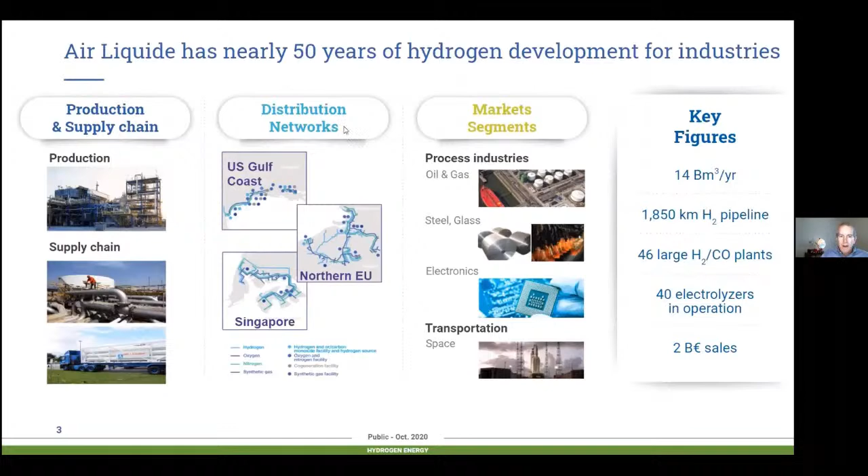When we think about hydrogen of the future, we're thinking about different applications than the industrial applications. And I'd like to tie us back to the Hydrogen Council, which is an international organization of CEOs from the leading companies in the hydrogen business, growing from the original 13 members now to 92 members, representing all different sectors of the economy, all different sectors of the world.

And that's reflected in some of the road mapping discussions focused around the US, how that dovetails with the global perspective. But let's talk about some of the things that Air Liquide is doing along this roadmap for investments, especially in North America. There's really 2 big projects that I'd like to capture today.

The first one is a new hydrogen production facility located in Nevada. It's a $150 million investment, so a fairly large investment for a company like Air Liquide, producing 30 tons per day of hydrogen that can be produced from renewable natural gas, so essentially renewable liquid hydrogen production, located in North Las Vegas, Nevada, with expected production to start in early 2022. Construction started earlier this year.

The second project I'd like to talk about is our largest PEM electrolyzer project, supplying 100% decarbonized hydrogen in Canada. This one is located in Bécancour, which is just north and east of Montreal. It's a $40 million investment, able to produce about 8 tons per day of electrolysis-based hydrogen. And all of this feeds into an existing liquefier that we have at the site, where we have other operations managing industrial hydrogen, for example.

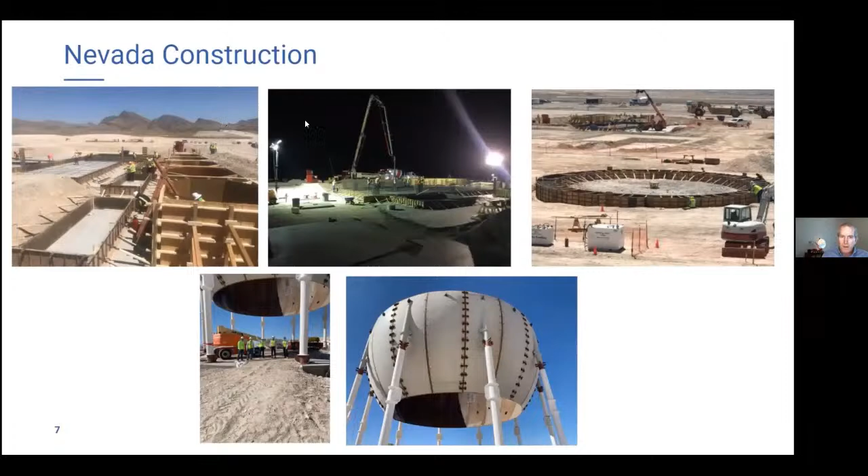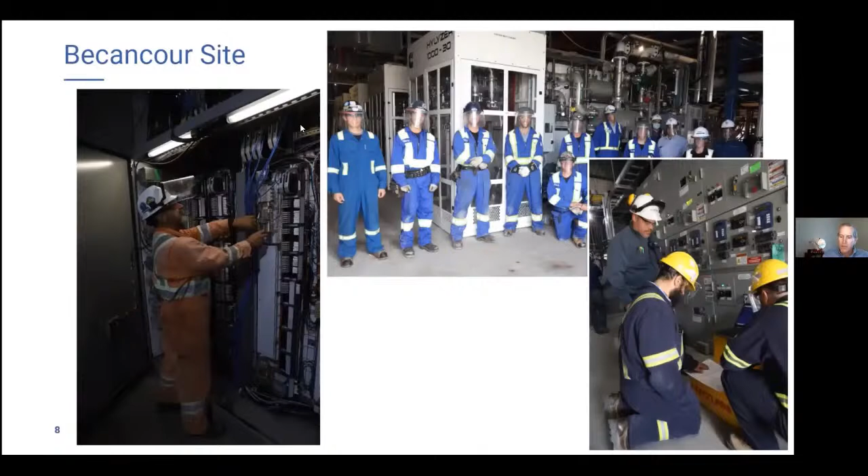The next project pictures are around the Bécancour site. Electrolyzers aren't quite as flashy. They tend to be small and they tend to be indoors, but the project for us is just as exciting. And you can see some of the pictures of the electrolyzer units and some of the electrical switchgear that's necessary for these projects. A very different kind of project, but having some of the same applications, and again, dedicated entirely to these new mobility markets, in this case, entirely renewable based on hydropower-based electrolysis projects.

One of the questions that we commonly get is, when will electrolysis-based hydrogen really be ready for the market? And I think what we're able to say is that the scale-up has already started, and projects like our project at Bécancour represent the future of electrolysis-style projects globally.

Just a few years ago, we saw the very first megawatt-sized electrolysis projects. And now we've seen announcements and investments by ourselves, by our competitors, and by other people in the market at equal scale, showing these many tens of megawatt size projects, leading to a future that's going to be hundreds of megawatts, potentially into the gigawatt scale of production for the next phases.

And these kind of investments are representative of what we're seeing around the world. So if you're questioning whether electrolyzers and electrolysis-based hydrogen is our future, you can look at the production rates from these projects and determine that we are on the pathway to that being the norm.

In addition to these, we've made a lot of other investments with Air Liquide, things like investing in some of the technologies with Hydrogenics, who produces those PEM electrolyzers, but also making investments in some of the users of the hydrogen, for example, FirstElement Fuel, who runs a network of stations in California. So by forming strong partners and by making these kind of investments, we're very bullish on the future here and looking toward a future of renewable hydrogen in the mobility markets.

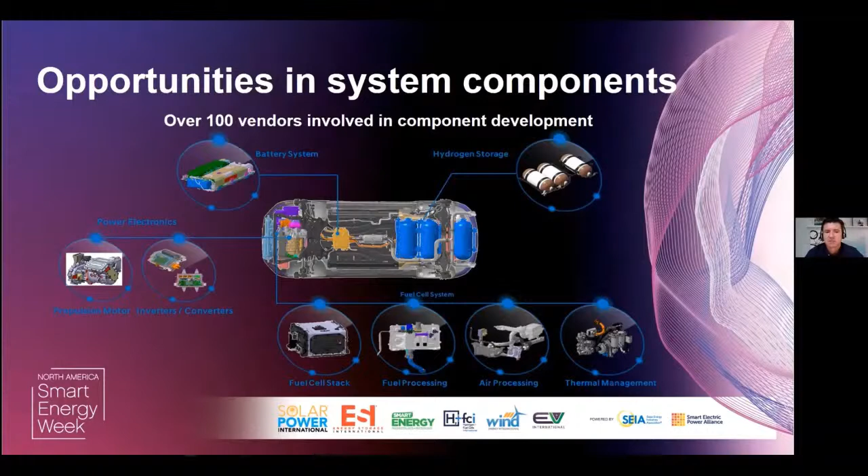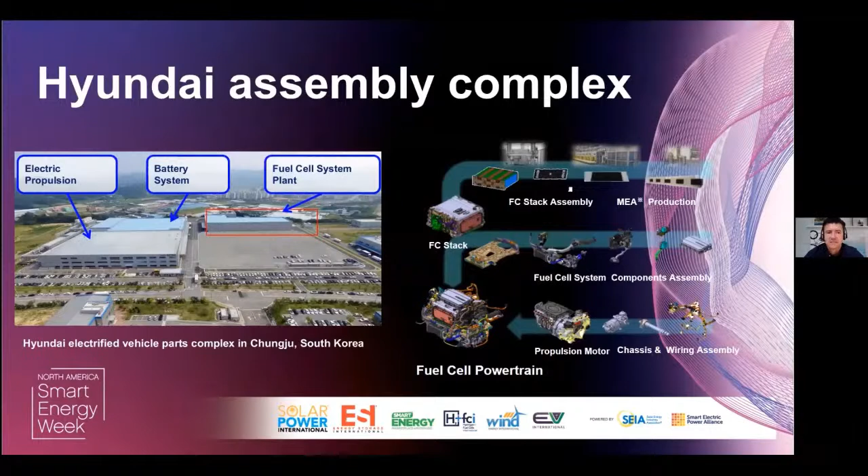So Hyundai is doing its share of investments and it believes in electrification. Here's an example of a complex built in the city of Chungju in South Korea, where we have some buildings dedicated to electric propulsion and battery systems, but we also have some buildings now dedicated to the fuel cell plant. The right side of that slide indicates all the components I was talking about that can be made in other facilities and come here to be assembled and create a new generation of powertrain.

You have transportation of that hydrogen that can also be an opportunity, and right now we convey it mainly by trucks, but maybe there are other applications that could be foreseen on a case by case basis. There's a distribution of that hydrogen, which is very similar to what you would have with gasoline, so you have employment there as well, and then customers. Obviously, we need a customer that can understand this ecosystem, and there are opportunities there too, depending on how customers purchase vehicles, for new business models going beyond the classic ownership we're used to.

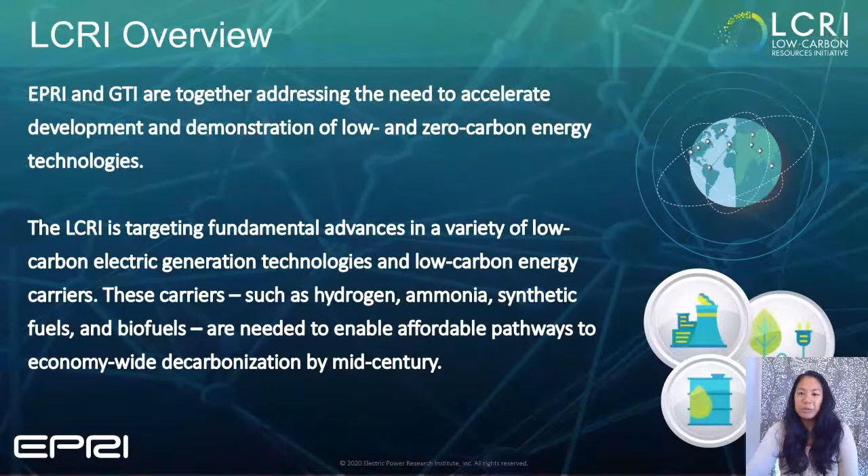We have made significant progress in terms of reducing our CO2 emissions by using solutions and technologies such as converting over from coal to natural gas for power generation, integration of renewables such as wind and solar, increasing our energy efficiency, and also looking at electrification in use cases where it makes sense. But as we start to move towards deep decarbonization economy-wide, we need to start looking at other low carbon resources such as hydrogen, things like ammonia, biofuels, and synthetic fuels. And that's what the Low Carbon Resources Initiative is going to focus on.

The LCRI is a 5-year global collaborative that is focused on low carbon resources such as hydrogen. We will look to identify and accelerate low carbon technologies, look to conduct technology assessments, inform stakeholders, and look to perform pilot and demonstration scale type projects for a broad range of technologies and solution pathways.

The LCRI will address low carbon resources or alternative energy carriers such as hydrogen, ammonia, biofuels, and synthetic fuels. And it will focus on the entire value chain, that entire ecosystem as it relates to these low carbon resources. We will look at technologies and solutions for the production of these types of low carbon resources. For example, when we look at hydrogen, we'll look at various technologies to produce clean hydrogen, whether that's green hydrogen coming from electrolysis or blue hydrogen coming from the use of existing fossil fuel assets such as natural gas.

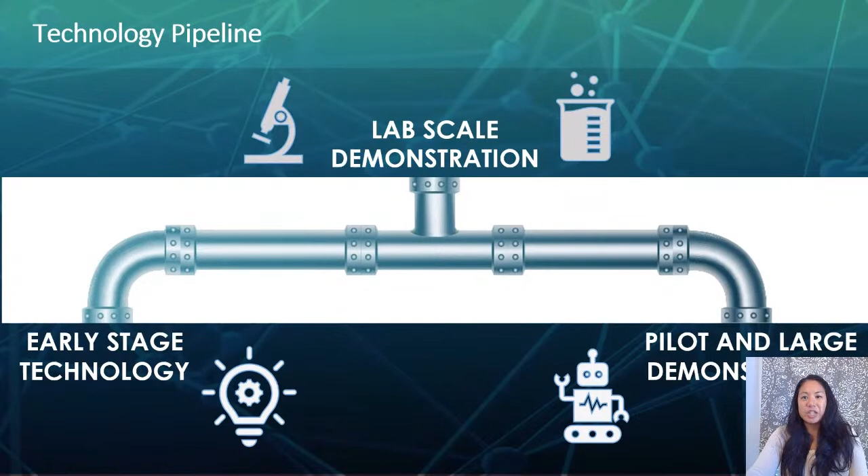One of the key elements associated with the LCRI is establishing our technical collaboration network. So this is part of our stakeholder engagement and really an opportunity for us to engage with the broader R&D community. We are looking for organizations such as universities, other R&D organizations, and national labs to participate in the technical collaboration network. We recognize that the R&D that needs to be conducted cannot only be done by GTI and EPRI, and that we must leverage all of our resources when it comes to the broader R&D community.

So this will provide us an opportunity to engage with other stakeholders on key aspects associated with the LCRI, as well as provide a network that we can lean on when it comes to conducting peer reviews of various research studies, as well as key milestones within the LCRI. So we're excited to be able to establish this, and we look forward to having broader engagement with the R&D community as we continue to execute studies under the LCRI.

Through the establishment of the Technical Collaboration Network, we anticipate not only being able to share knowledge and information through various meetings, but also to be able to offer opportunities for journal publications, as well as conferences that are focused on the LCRI research. Again, this is really to focus on that broad stakeholder engagement with the R&D community. And so we hope that you consider joining the TCN and engaging in the LCRI.

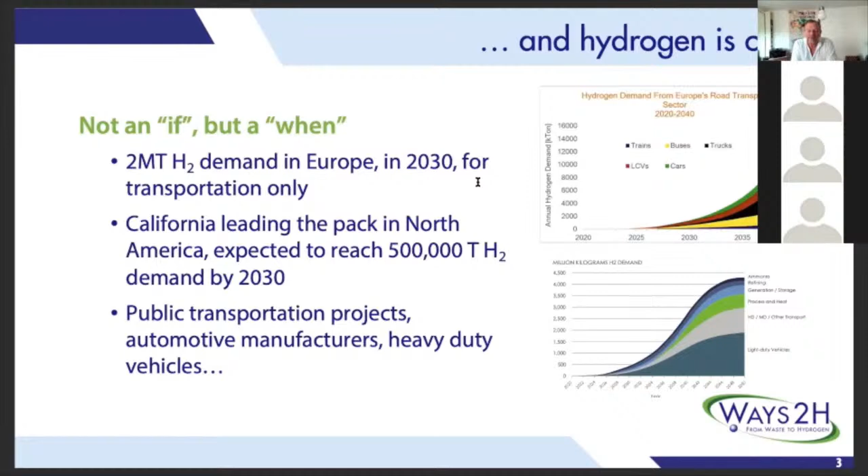Well, it will come from public transportation projects like fuel cell buses, fuel cell shuttles. Of course, automotive manufacturers are getting into this market. We already see Toyotas, Hondas, Hyundais, Mercedes-Benz is also coming, bringing fuel cell electric vehicles to the market, and also, of course, heavy-duty vehicles like trucks, forklifts, or other port logistic equipment that are gradually turning to hydrogen-based solutions.

And why hydrogen? Well, hydrogen is renewable, or hydrogen has to be renewable. It is a clean source of energy. When hydrogen is being consumed, the only output of that consumption is water. There is no CO2 being emitted, no carbon monoxide, no hazardous emissions, no particles, not a single greenhouse gas.

And it is important to realize that renewable energy is not only solar, it's not only wind. And the public today, when hearing about renewable energy, usually would think about solar, about wind. Again, we are totally for this type of energy. We do believe, and we know that these are absolutely necessary, but there are applications where solar electricity, wind electricity, hydroelectricity will not be enough. And most of these applications relate to

applications where today we are using fuel like diesel oil, like gasoline, applications where the users require a quick refill, applications where the users require a lot of power, like heavy-duty vehicles, and also possibly long-range mileage, for example, again, trucks or buses. Also, long-term storage is something that is much easier done with hydrogen compared with batteries, which although having made a lot of progress in terms of cost, in terms of storing capacity, still are showing a few challenges.

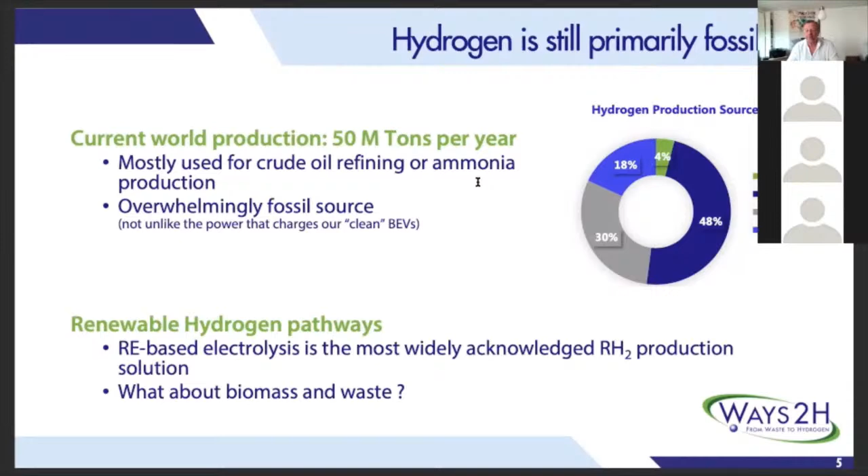Of course, there are pathways for renewable hydrogen. The primary pathway today is renewable electricity-based electrolysis. Most projections about renewable hydrogen production are considering this electrolysis as the pathway for renewable hydrogen production. But we do believe that there is a potential third pathway, another solution, and that would be biomass and waste.

The primary reason for that is waste to hydrogen solutions, first, are predictable. They operate continuously 24/7. And while doing that, they are also addressing another major environmental issue, which of course is waste. When designed as small-size distributed systems, these solutions improve waste logistics, make our environment better, and also can provide a decentralized energy production. We're talking about the microgrids of the future, the waste logistics and the waste processing microgrids, as well as the energy production microgrids.

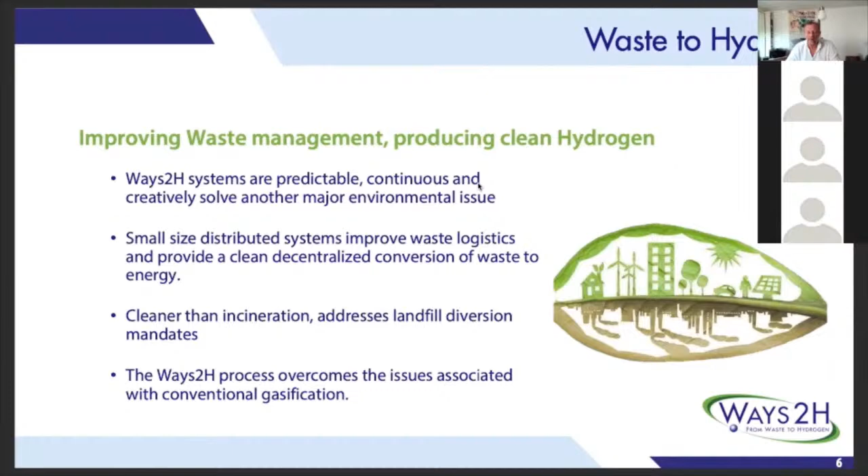The solutions like ours, like the one we are today promoting and commercializing, are of course cleaner than incineration, but also at the same time they address another major challenge that is today presented to waste management companies, which is landfill diversion mandates. Lots of states, lots of countries are trying to reduce the impact on landfills and are actually issuing mandates to the waste processing industry so that they reduce the quantity of waste being sent to landfill. We are offering a solution like this.

We talk a lot about waste, but actually there is already a renewable source of energy that everybody knows, that's biomass. It's being used for biofuel production, also for other applications like cosmetics, perfumes, etc. But a biofuel, when used in a car, and you may know that there actually is a fraction of biofuels in the gasoline we are using today, well, those biofuels are still emitting CO2 and other greenhouse gases.

The US Department of Energy and the Oak Ridge National Lab issued a report in 2017 called the Billion Ton Report. That report basically states and demonstrates that there is approximately 1 billion tons of biomass potentially available in the US. This billion tons of biomass is equivalent to about 50 million tons of hydrogen. That's the current worldwide production.

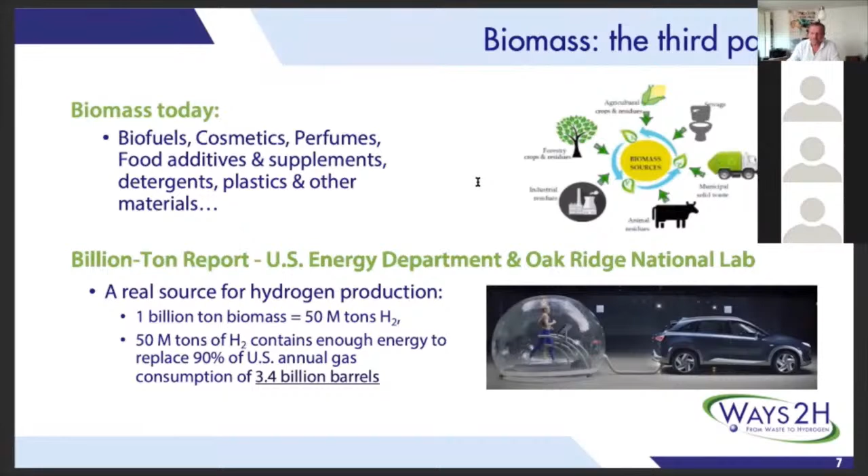And it has a lot of advantages. The thermochemical conversion processes that are being used to convert biomass into hydrogen, most of them are self-sufficient. They do not need external energy sources to operate. They can produce either a gas or liquid fuel or hydrogen like ours without needing an external source of energy. They are clean, so they significantly reduce the current greenhouse gas emissions.

They basically have no liquid effluent. There is no waste coming out of it, except maybe one single output of carbon dioxide that, because the source is biomass, is basically neutral. It does not add carbon dioxide to the atmosphere. It merely replaces it. But because it comes from a single output, there are further beneficial uses for this CO2 that we will talk about later.

And I said earlier in our introduction that waste to hydrogen is not here to compete with solar electricity. What we need to realize is today the electricity production infrastructure worldwide is generating about 20,000 terawatt-hours of energy per year. At the same time, the fuel consumption in terms of energy is 31,000 terawatt-hours, also worldwide per year.

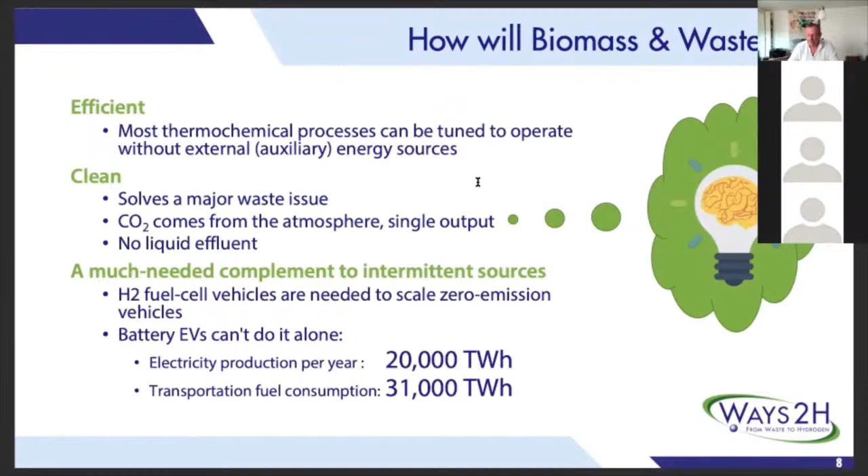And we only have two byproducts. One is ash, the inert minerals contained in the biomass and the waste. The other byproduct is the flue gas I was talking about earlier, which contains carbon dioxide, and again, it is important to realize that this carbon dioxide does not add greenhouse gas to the atmosphere.

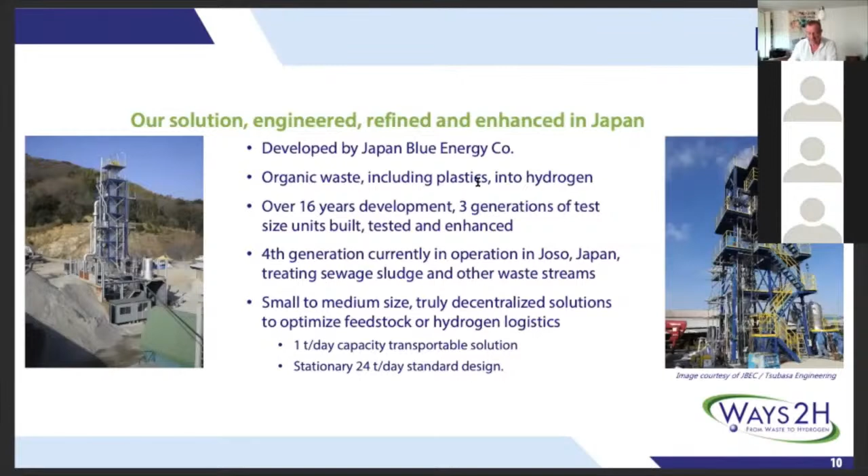And we offer our solution in basically two designs. One is a transportable unit with 1 ton per day waste processing capacity. The other standard design comes with a 24 ton per day processing capacity. It is a stationary system that more or less looks like the one you can see on the left side of this slide.

How do we do this? Who are we? Ways2H is a partnership between Japan Blue Energy, the developer of this technology, based in Japan, and a group of investors gathered under a company called Clean Energy Enterprises.

We are based in Long Beach, California, and from Long Beach, California, we are providing engineering, construction, as well as commercial developments for the systems that embed this technology developed by Japan Blue Energy. So we are not system operators.

What we do is we build and sell systems to potential users, either companies who have a problem with waste and want to process waste in a clean and efficient manner, or companies, operators who want to enter this emerging market, which is renewable hydrogen production. The solutions we offer are decentralized energy production solutions.

That means being able to process between 8 and 48 tons per day of waste, and out of this waste, extracting between 300 kilograms and 2 tons of hydrogen per day. Just as a reference, the average hydrogen filling station would consume approximately 1 ton per day. So what you have here really is the hydrogen and energy station of the future. Actually, that future is not so far away. We can probably say it's the station for the 21st century, because those systems are available now.

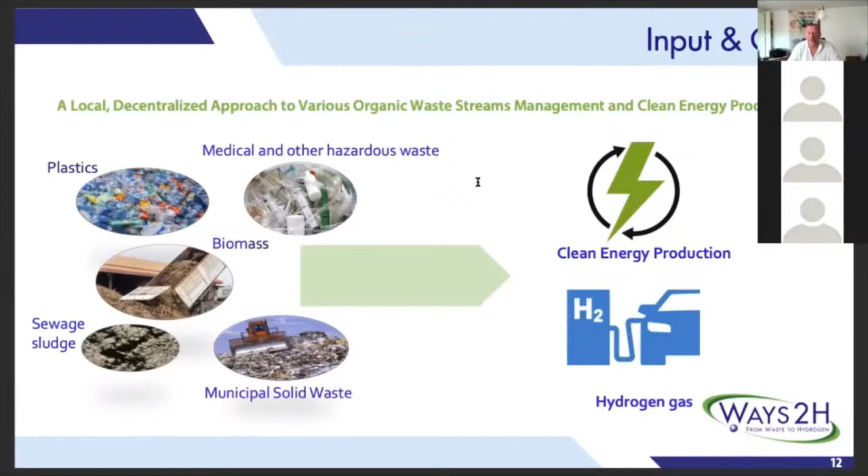This hydrogen can be used directly as a gas for clean mobility applications. And wherever there is no application yet for clean mobility and for fuel cell vehicles, this hydrogen can be directly injected into a stationary fuel cell and produce power locally. So again, what we have here is a local, decentralized approach to waste stream management and clean energy production.

Applications for this? Well, I'm maybe a little redundant here, but the primary application for our solutions is hydrogen production for the clean mobility market. Hydrogen is still presenting a few challenges in terms of logistics. Hydrogen is not a very dense gas. It needs to be compressed to be moved around. The fact that our systems are decentralized allows the processing of waste locally.

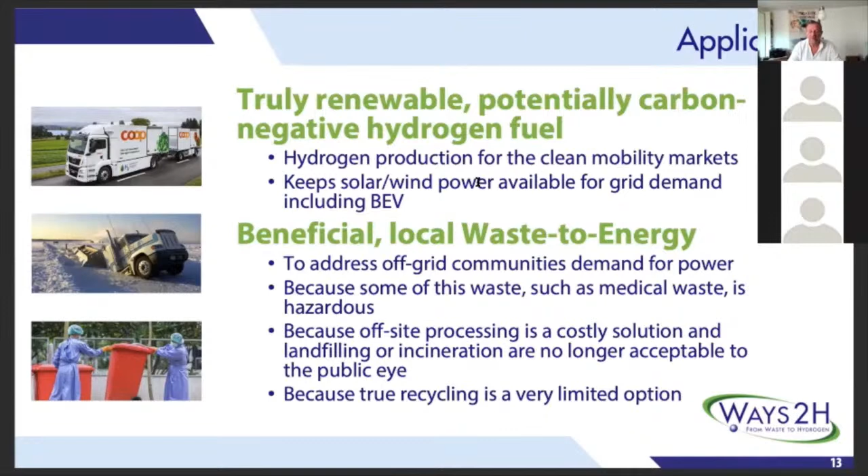This is very important, for example, for medical waste processing. As you can see on the bottom photo, you don't want to send hazardous, potentially pathogenic waste over long distances for remote processing. We want to process this locally. And also, we want to produce hydrogen where this hydrogen will be needed: directly, for example, in a hydrogen filling station, or in a remote community where this hydrogen will be used for power generation, or also to fill the tanks of the clean mobility vehicles that are coming today.

Well, using biomass and waste as a hydrogen source offers an opportunity to go even beyond being merely carbon neutral. When combining our solutions with carbon capture and sequestration technologies, the fact that CO2 comes from one single output point makes this carbon capture and sequestration technology easier to implement together with our solutions.

And in that case, this renewable carbon that comes from the atmosphere, that was part of the production of the biomass and of the municipal solid waste that we are processing, is effectively taken out of the atmosphere and can be sent underground or sequestered in areas or applications where it will never come back to the atmosphere. This is the definition of carbon negativity, and this is what we can offer as a decentralized solution.

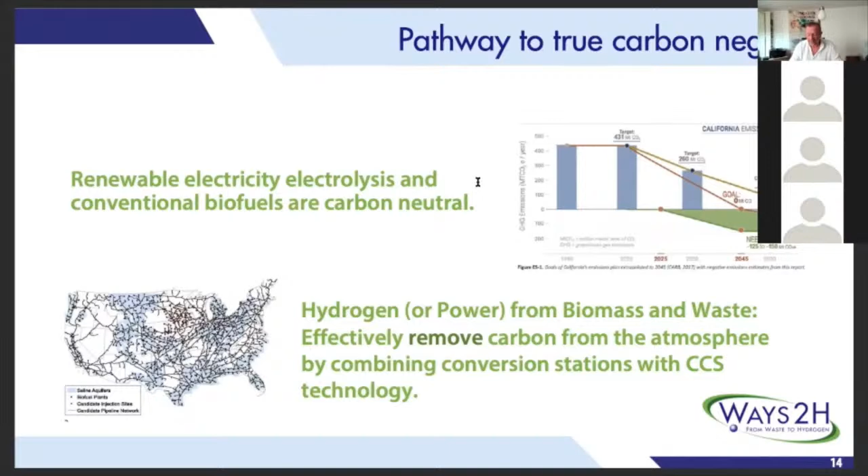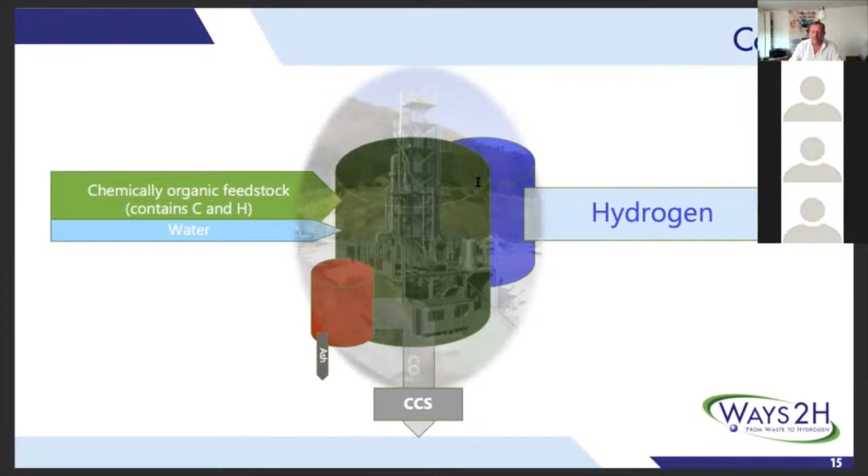In that case, you saw the concept earlier. Well, it's kind of simple. We keep our system, but rather than sending the CO2 to the atmosphere, we send this CO2 through a carbon capture and storage or sequestration solution, and that carbon goes underground. That way, we reach carbon negativity. I kept talking about our system being decentralized. Power microgrids are truly needed and are happening worldwide.

From our state in California, we are unfortunately seeing situations like the wildfires, for example, that are demonstrating the need for microgrids. Centralized power, when suffering interruptions or maintenance stops or other climate or atmospheric events, power shortages are happening. What we propose is a solution that would not only make power generation microgrids a reality, but add another dimension: both waste management, waste being processed near its point of production, and hydrogen production, where that hydrogen could directly be used as a fuel.

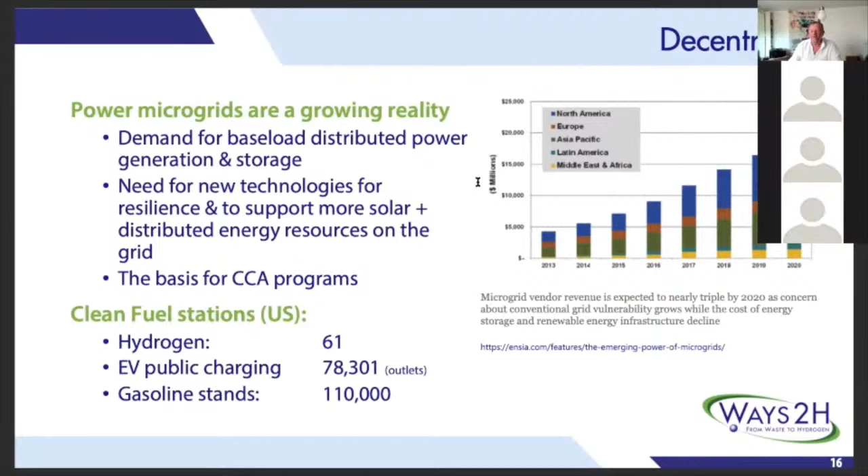As you can see in the figures at the bottom of this slide, we only have about 60 to 70 hydrogen fueling stations in the United States today, compared with 110,000 gasoline stands. Of course, the demand for hydrogen is not as high as for gasoline today, but there is a major need arriving, and this will keep growing. You probably remember the trend on California hydrogen demand, starting from 500,000 tons in 2030, going up to more than 4 or 5 million tons a few years later. This demand will help complete and add the hydrogen filling stations needed nationwide to cover the fuel production grid.

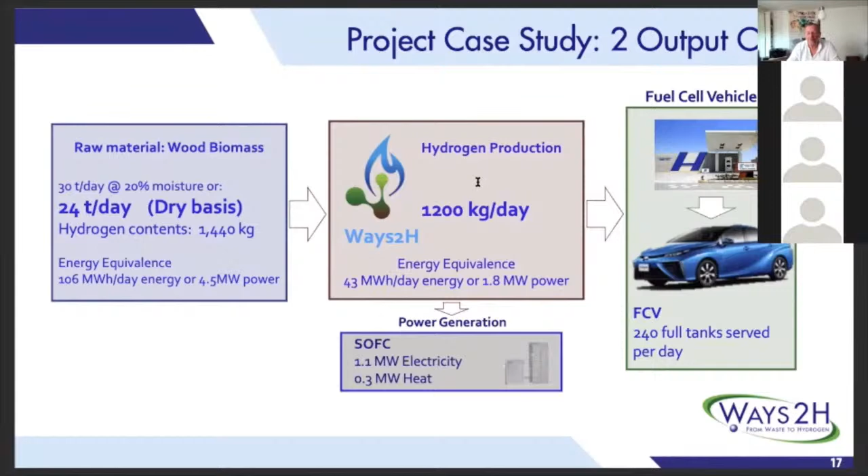I mentioned a 24-ton per day system earlier. Typically, this is what we see as a standard design, a modular design, what could become the station of the future. 24 tons per day of waste contains approximately 1.5 tons of hydrogen. Going through our system, we can extract about 1.2 tons out of this 1.5 tons, and 1.2 tons of hydrogen is the equivalent of approximately 240 fuel tanks served per day, for passenger vehicles. If there is no demand yet for hydrogen, this 1.2 tons can be injected into a stationary fuel cell where it will generate a mix of electricity and heat. Typically, 1.2 tons of hydrogen per day is the equivalent of 1.1 megawatts of power generation.

Thank you very much, this is where I have finished with my presentation. I will be happy to answer questions via email or maybe via this platform. Thank you very much for your attention.

Hi, Jean-Louis. Hi, Cassandra. Thought I would ask you a few questions. All right, please go ahead.

How does waste-to-hydrogen fit into the hydrogen economy? Well, today we are reaching commercialization. The hydrogen market today is approximately 50 million tons, and it's gradually growing. We see major emergence in the western United States, and also in Europe, for mobility applications, with more and more fuel cell buses coming online. About a week ago there was a plane that started flying with hydrogen, so it really is happening today. We have just submitted a commercial proposal for a system that will produce hydrogen for clean mobility. We see ourselves as potentially a third pathway to complement renewable hydrogen production from electrolysis. Renewable electricity-based electrolysis is today considered the simplest and potentially cheapest way of producing hydrogen. We believe our solution is equally cheap, very competitive, and on top of that will solve another major environmental issue we are all experiencing today, which is waste piling up everywhere. So we are a perfect fit for the hydrogen economy.